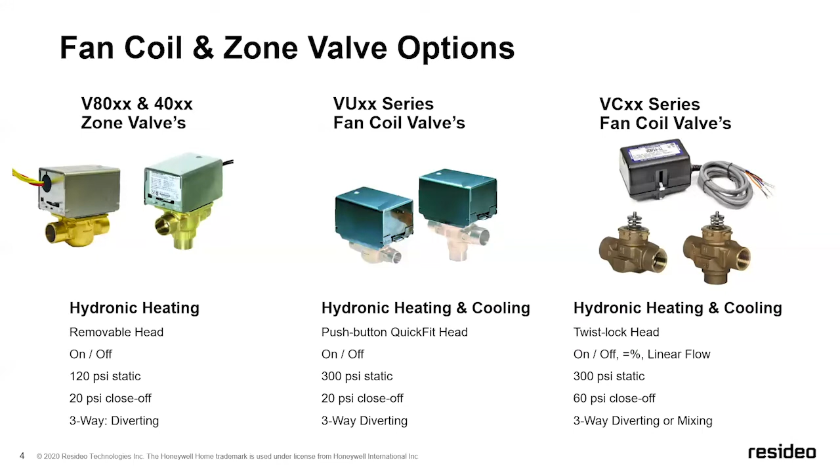Before we jump into any of the technical pieces pertaining to individual valves, I wanted to go over some valve terminology and a basic overview of some things that are consistent across virtually all the configurations that we have. So before we talk about the valves, let's cover the configurations.

In the United States, for radiant heating applications, people typically order a normally closed valve. What that means is that port A is closed, closed via a spring. So when power is not at the valve, a spring holds it in the closed position. It's operated with a standard thermostat that turns it on and off, and really only takes 2 wires to work. I'll go more into the wiring later in this presentation.

In Canada, or at least certain provinces, we see more normally open valves. There's an advantage to that: if the valve fails, the spring forces it open. So in extremely cold climates, if the valve fails, it will go back to the open position, and if you have a pump on, it will still deliver flow through the zone. It gets a little more involved with the thermostat because you have to operate it in reverse, but it's still a simplistic operating valve—2 wires, taking 24 volts or 120 to open or close it.

The other terminology thrown around depends on whether it's residential or commercial. In residential or light commercial, we usually see normally open or normally closed. In the commercial world, you'll see fail open or fail closed—they mean exactly the same thing. I get that question a decent amount.

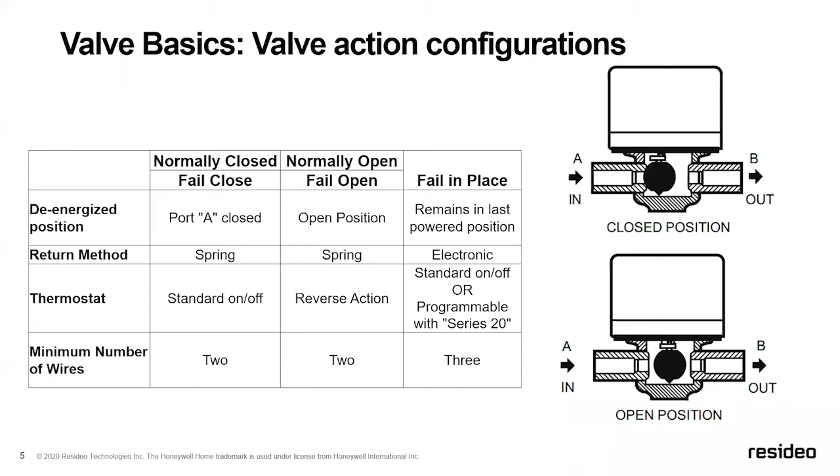The one that's a little unique is the fail-in-place valve. There are no springs in a fail-in-place valve. When you take power away from that valve, it remains in whatever position it was left in, so you essentially have to have voltage to open and close it. We'll talk about these primarily on the VC series valves, but it can be operated either with our Series 20 valve or a standard on-off, depending on the actuator type. The unique piece is that, because there's no spring, it takes 3 wires at a minimum—instead of spring returns like the normally open or normally closed, where you give it 24 volts and the spring takes it back, with this one you have to have electricity to power it open or power it closed.

When we get into positioning and essentially the way valves operate, one thing I want to mention is that when you're looking at a valve and talking about which port is closed, with our product offering we always spec the A port. So if the valve is closed, it's the A port that is closed. All of our valves are stamped with an A and a B, and 3-way valves are stamped with an AB. In a 2-way configuration, that doesn't matter too much, because it doesn't matter if the A port or B port is closed—if either one is closed, you're not going to get flow through.

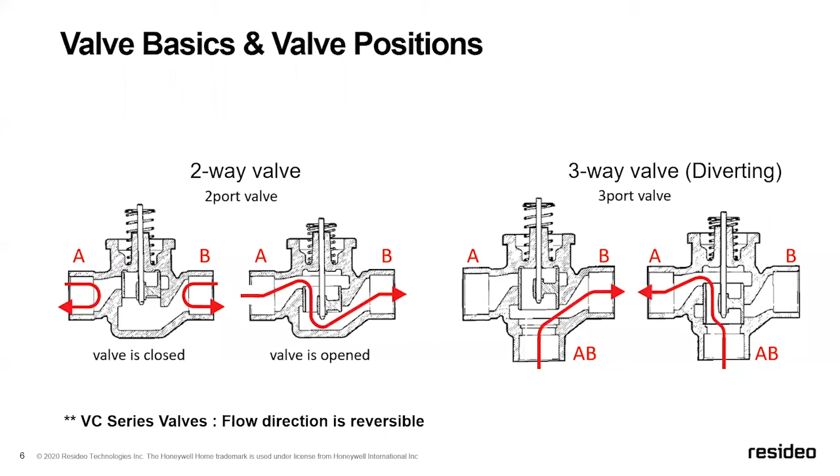Where this does come into play much more is if the A port is closed on a diverting valve. Looking at a 3-way valve in a diverting application—I'll talk about the differences between diverting and mixing later—typically in a diverting application you take water into AB, and it exits either through A or through B, depending on if the valve is open or closed. So in this example, if port A is closed, flow will come in through AB and exit through B. When you give it 24 volts, it flips the positioning of that valve, and now your flow transfers from AB to A. So you're basically diverting the water either through B or A, depending on if you energize the actuator.

Now, when you get into our VC series valve, we do have the ability to do mixing. So what I'm going to do is keep expanding on these 3-way valve configurations and terminologies. If you look at just the basic on-off, meaning the valve is going to open or close and that's it, we call that a changeover valve.

In a mixing operation, you're going to go backwards from the way I just showed it. So you're either going to come in through A and take it to AB, or in through B and take it to AB. In other words, you're having 2 inputs and 1 output. In a diverting operation, it's the previous slide I was showing you, so you're going to divert flow one direction or another.

Now, where our VC series valve becomes unique is you can operate it in a control configuration, meaning you can actually vary the voltage which is going to open that valve proportionally. If you look at it from a mixing standpoint, which is the predominant method I see with these, you can fluctuate that valve to take a mixture of water in from A, which could be hot, and B, which could be cooler, to deliver a consistent temperature coming out of it.

So we usually use an external control to do that. And then same in diverting, but typically in diverting applications, I either see it all the way open or all the way closed.

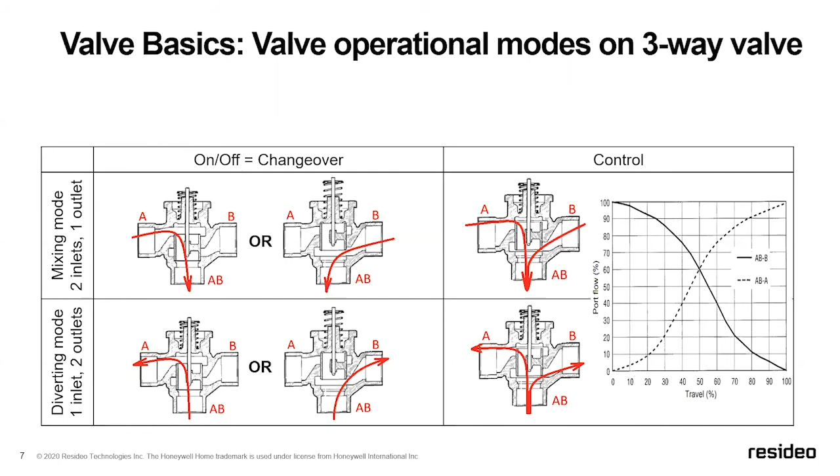The next thing I want to talk about is CV ratings and close-off pressures, because this is something I get asked a lot about. What I've done is I've listed the two zone valves, the V80 series, that are most commonly sold in the Western US. Those two valves are the E1061 and the E1012.

What that means is, if you look at a CV rating, the easiest way I have discovered to explain that is, if a CV rating is set at 3.5 CV - I'm going to use the example of the 1012 zone valve that's up there, the V8043 E1012. It has a CV rating of 3.5. The easiest way to explain what that means from a pressure standpoint is, if you were to take 3.5 gallons a minute through the valve that has a CV of 3.5, that will result in a loss of 1 PSI.

But when we're looking at a radiant world, we typically measure our pressure loss through feet of head instead of PSI. So if you're looking at that 1 PSI of loss, that's going to come out to 2.31 feet of head.

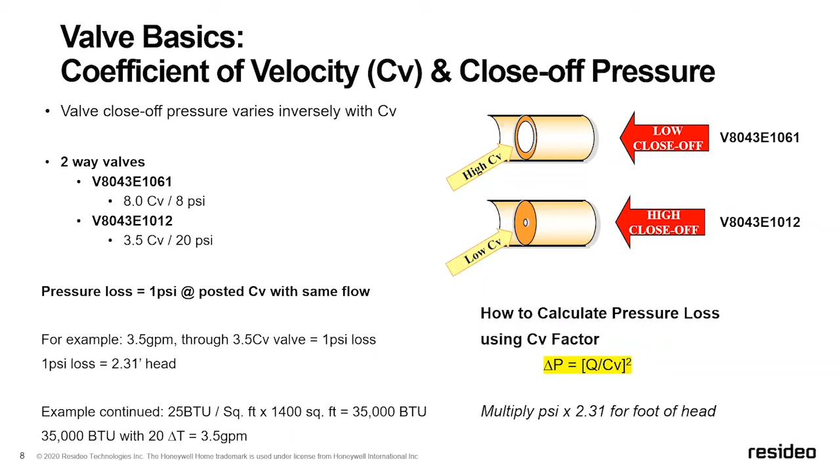That also means the lower resistance you're going to have, but if we look at that 3.5 CV rating again, I don't think I've designed a hydronic system that had the capabilities of needing a larger pump based purely off of 2.3 feet of head added to it. So personally, I'd rather have the higher resistance, the lower CV rating, to give me a valve that has less chance of getting pushed open. I've never really seen that small a pressure loss require a larger pump.

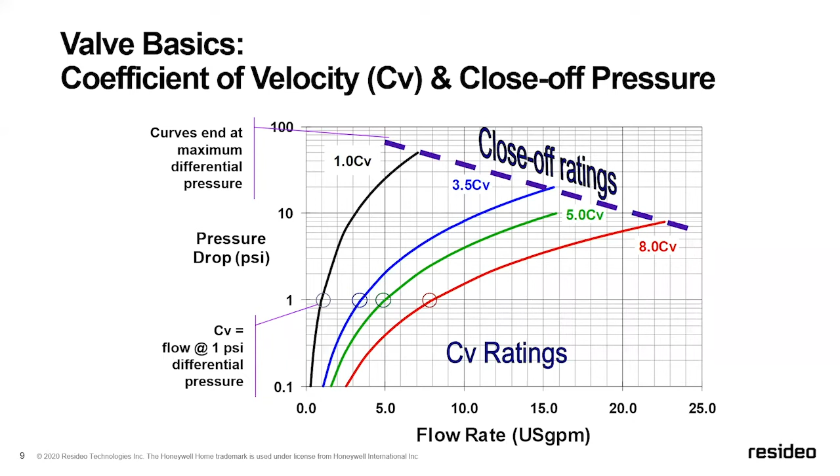With that being said, I think I've covered most of the general terminology that goes into virtually any type of fan coil or zone valve. What I want to do is go through the different series that we have and talk more in detail about the applications, how they work, and what they look like on the inside.

I'm going to start with our V80 and our V40 series. These are the same series valves, but we use a plug style valve with a ball seat. I've got some images I'll show you to talk about what that is. The temperature range on these is 40 to 240. We do offer a steam version of this, and primarily these are utilized for hydronic heating only. We do have some versions that can be used for cooling, but we've got a couple different series of valves that do a little bit better for hydronic cooling.

Traditionally, these series valves for hydronic heating only are on-off control, spring return, and your close-off pressure, like we just talked about, varies depending on the size and the CV rating that you have. The close-off pressure on these ranges between 6.5 and 20 PSI. You've also got a size range on these from 1/2 inch to 1 inch.

We have lots of different connections and styles. For the pipe connection, we've got sweat, press, threaded, flare, as well as inverted flare. On wiring connections, we do 2-wire, which is just the motor, 4-wire, which is the motor and an end switch, and we also offer a terminal strip, which is just the screw terminals. Lots of different configurations. 3/4 inch is by far the most common size, and in the Western US, I see much more with 4 wires, but we've got lots of different options.

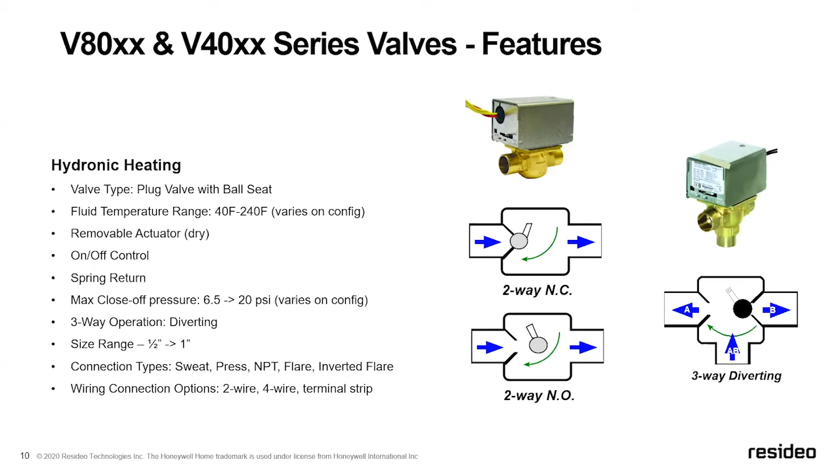Inside of this product family, to continue on with all the different configurations, we have 2 different series of valves. If you look at our 1000 series, that's the one we've had probably the longest. The actuator, which is the silver piece on top, can be removed. That is your most wearable piece, where your motor lies, your end switch lies, everything electronic lies inside of there. We've got the ability to take that off without ever having to service the water.

On the 1000 series, we designed the body to handle 125 PSI static pressure. I haven't seen a residential system get anywhere close to that, and even light commercial systems, that's a pretty hefty pressure on the valve itself. We've got a fairly low current draw. The end switch is rated at 4.4 amps, so you can use light pumps through the end switch. The ball assembly is completely serviceable. The beauty of that is once you sweat that valve in or press it in, once you connect it, there's really no need to ever take that valve back out of the piping.

The reasoning is we've got an adapter plate which can be removed and reinstalled, which is your actual moving parts inside of the valve. We do a 1-year warranty on those.

We've also created another series called Series 5000. It's a little different - same principle, ball style design, but it has a push top on it, so the actuator has a little push button that allows you to remove it instead of screwing it down. The static pressure on this is 300 PSI, much higher pressure rating. It also draws a little less electricity - 7.2 VA instead of 7.7.

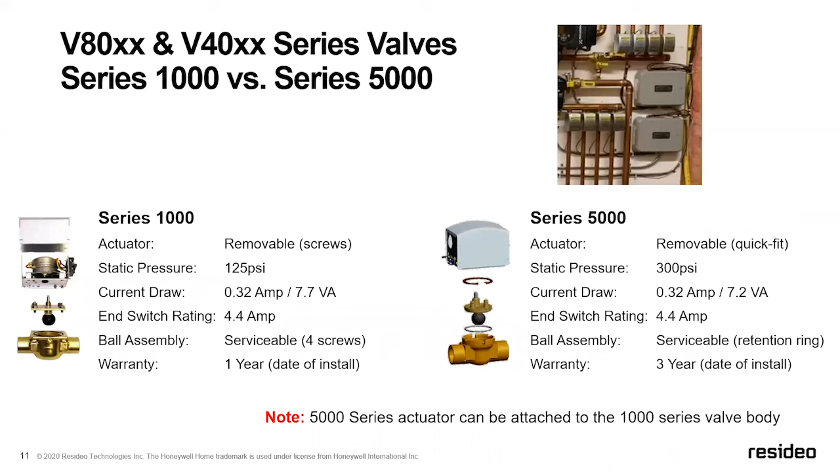Now, the beauty of this valve that we've had for a long time - part of the reason we've been so successful with it - is the actual closing method inside. We use a ball, with a couple different material types, that actually rotates on a spindle. So what makes this unique is as it closes, that ball is going to spin on a spindle, closing on a different spot every single time. So when you look at the wear and life on this, it's significantly better than most of our competition - and by most, it could actually be all.

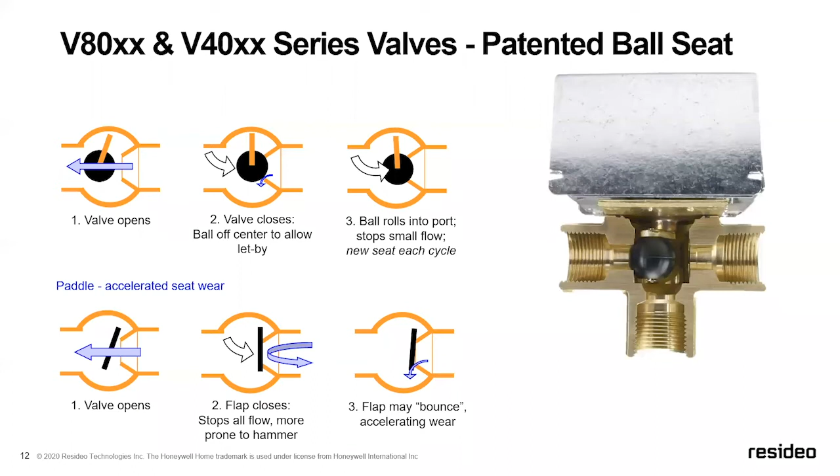I've shown the difference between our plug style valve and a flapper style valve, which exists. When you look at the flapper style, it's going to open or close kind of like a toilet flapper - closing on the exact same spot every single time. Some of the problems with this is it can cause the valve to flap and bounce when it closes, creating water hammer. When you look at the wear characteristics of closing on a single spot every time versus closing on a ball that's spinning around to a different spot every time, you can imagine the longevity of ours compared to our competition.

We've actually gone through and done a test at one of our factories in Mosbach, Germany, where we took a third-party valve and closed it, then looked at the pressure change versus ours. You can see one of our competitors bounces around quite a bit, whereas ours is a very smooth line. I'm showing an image of our 5000 series valve on the right-hand side. The big identifier, jumping back a bit, is the curved top - the 1000 series has a square top. But since we engineered these actuators to go on either the 1000 or the 5000 series valve, this actuator will actually help with water hammer.

So in the rare cases where our 1000 series valve ends up with water hammer, you can take this power head and put it on that body. 9 times out of 10, that will eliminate the issues. If you're having water hammer with any of our valves, more than likely there's something in the system that's causing it.

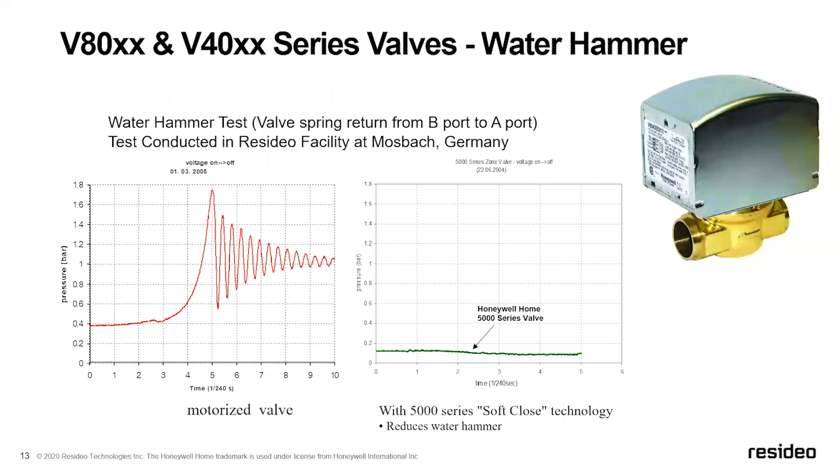But throwing this actuator on that valve body will more than likely solve, well, I should say band-aid the problem. Now I just wanted to touch briefly on our nomenclature. There is a method to our madness on all the different part numbers.

So if you go through this quickly, the first letter designates that it's a valve. The reason I say V80 and V40 series is it's the same valve, but the only difference is the 80 is going to be low voltage, typically 24 volts, whereas the 40 is going to be your high voltage equivalent, so 120 volt, 240 volt, etc.

The next set of numbers designates if it's a two-way or a three-way valve. Then the letter in the middle is actually going to designate what type of configuration it's in. So is it normally open or normally closed? Does it have 2 wires or 4 wires or a terminal strip? It characterizes the configuration of the valve body as well as the electrical connections.

Carrying that through, the next number is going to designate the static pressure rating. So again, if it's a 1000 series, it's going to be a 1. 5000 series is a 5. That's kind of where we came up with that nomenclature. And then the next set of numbers is going to tell us all the extra stuff on it - what the pipe connections are, what the CV rating is, what the size is - those are determined separately.

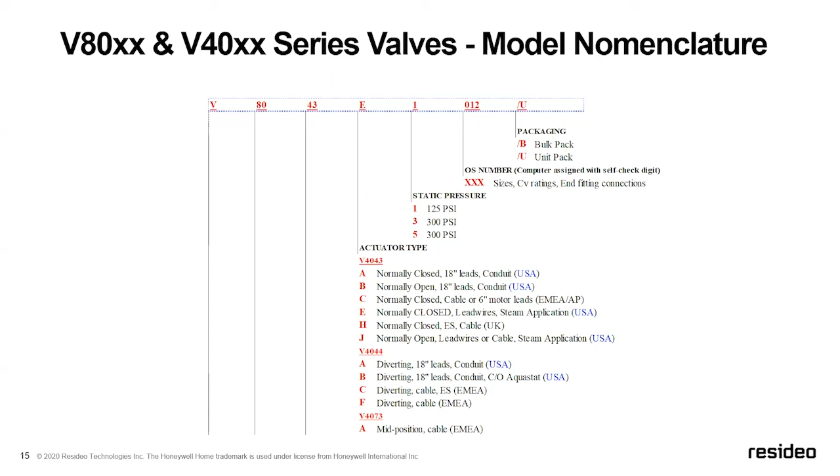Now, we make a lot of different repair parts for these valves. We've had them out in the industry for a long, long time. It's been a very robust valve, and there's a couple different repair parts for them. If you're looking for different repair parts, we have motors that can be replaced by themselves. Each one of these has got a different part number. We make some that are for hot water only, a couple that are for steam, and we do make a couple that are plated so they can handle heating or cooling. But again, most people go to a different series when we look at those.

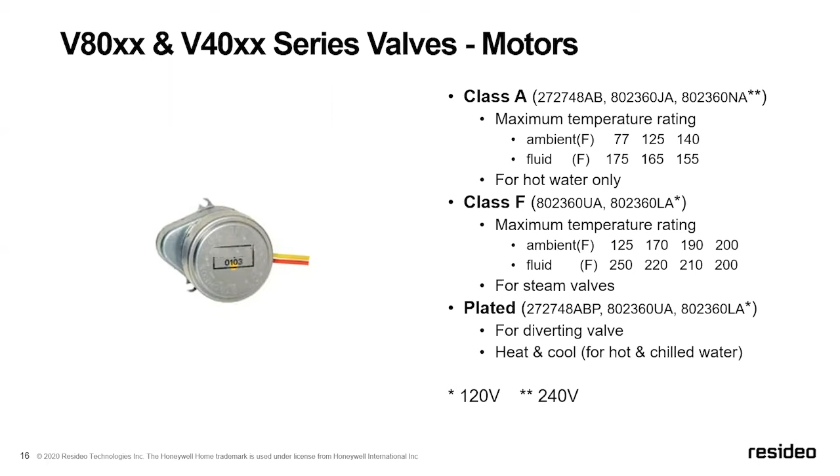And then we also do a couple different adapter plates. What I've seen a lot of people do - you've got two options if you want to replace the guts of the valve. Let's say you've got really bad water quality, it's eating up parts in the valve. You can either buy an adapter plate, which is going to be that piece that sits in between the actual valve body and the actuator that sits on top, and you can get a couple different types of balls in there - we've got some that are Buna rubber and some that are EPDM, I'll show you the difference. But what most people do instead of getting the adapter plates is just buy a new valve and walk it to the job site and replace both the actuator and the motor together.

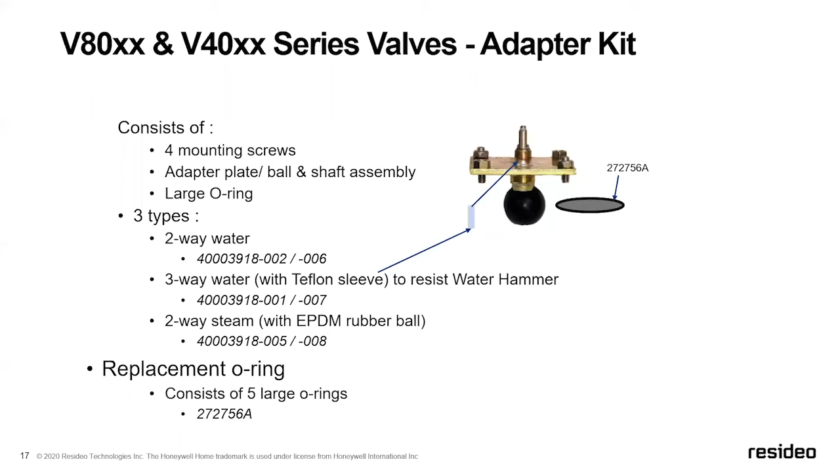When you look at the balls that we use, most commonly we use the Buna rubber. It's used in the majority of our zone valves, our V80 series zone valves. It's resistant to a lot of chemicals that are in the water. But we do offer an EPDM unit, and we identify that style of valve with a white ball. So if you're doing a steam application, you'll want to double check that the ball has got the little white mark on it, so it can handle high temperatures and also oxygenated water. We've got a couple areas of the country where some contractors installed jobs with AquaPEX instead of hePEX - not to pick on Uponor for the branding there - but if you have tubing that does not have an oxygen barrier on it, you may want to look at getting an adapter plate that includes that style of ball because it's going to do a better job of resisting wear.

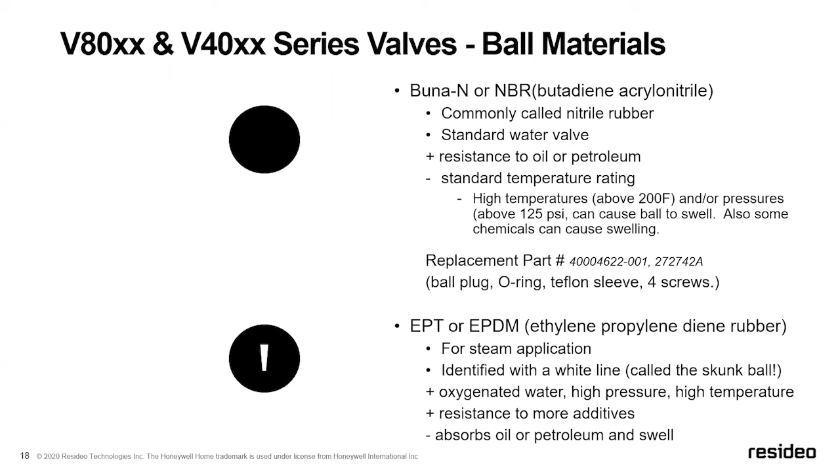When we go to our VU series valve, they are very, very similar to our 5000 series valve we were just going over, so I'm not going to spend as much time on these. The big differentiator on this is the temperature range. These can be used in both heating and cooling applications, with a temperature range from 34 to 200 degrees.

These are also going to be on-off, spring return. We do have some higher close-off pressure ratings on these, but we also don't offer as many connection types. So your options are either sweat or threaded, and your wiring is either 2-wire or 4-wire. Very similar to the series we showed before.

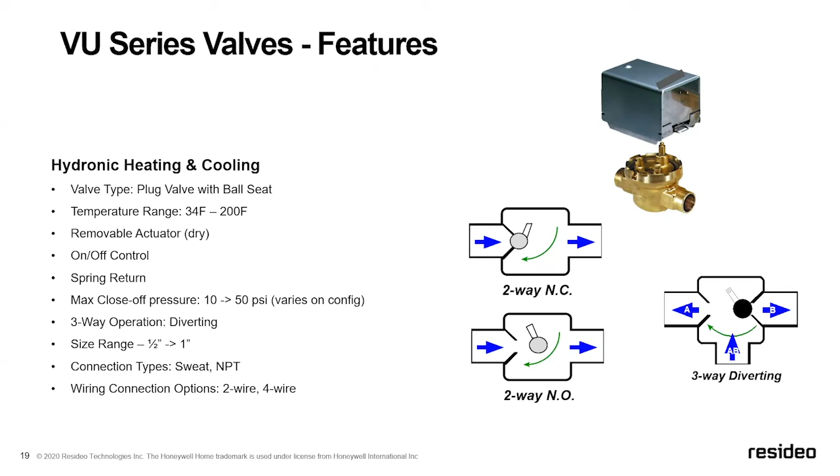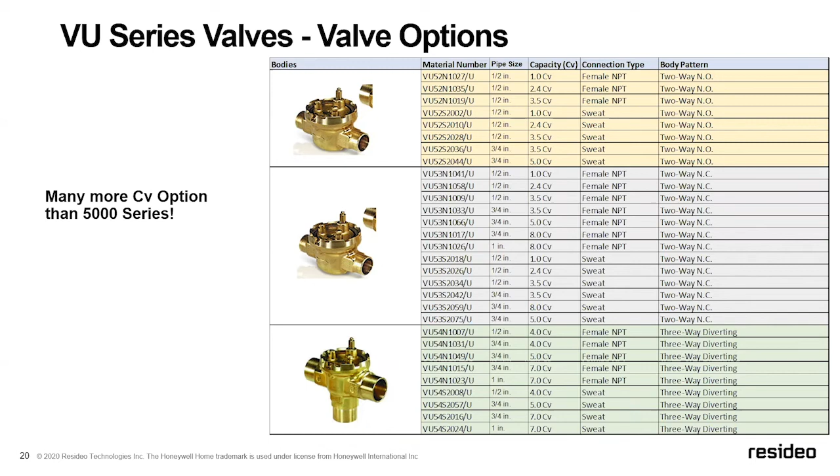The big difference is you buy these units separately. Whereas the V80 and the 40 series you buy as a pair, with this series you're going to buy the valve body and the actuator separately. The big thing I want to highlight is if you're looking at your different CV ratings, if you really want to dial the flow rate into, say, a fan coil, this is probably going to be a slightly better application because you can dial those CV ratings in much more exactly than you can on our 5000 series.

The other thing we do is these are in a slightly lower profile, so they're great for tight spots. If you have baseboard enclosures or other areas where there's not much room, these fit in a very low profile. We also offer corrosion resistant actuators, so if you're in an area with high humidity or other chemicals in the air, we have corrosion resistant actuators which make it a little more resilient out on those applications. But other than that, it's very similar to what I was just showing in the previous series, as far as the way the valve operates and the ball inside of it works. It's basically the same style of valve, just separated, and you've got more options there.

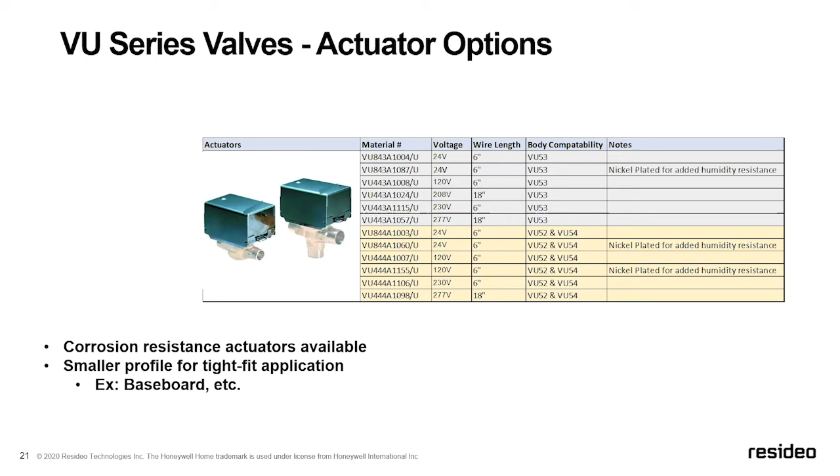Now, where things change dramatically when you're looking at our valve offering is our VC series valve. Instead of using a plug style like in the previous two series I showed, we use a gate valve here. The temperature range on these is great for heating and cooling, from 34 to 203 degrees. Not only do these do on-off, but we also offer these in floating and modulating.

Now, the big difference when it comes to wiring, these are not spring return. I've got some wiring examples I'll be showing in just a few minutes that will walk through how you wire up all the different series of valves I'm showing you. But these are a little different than what a lot of people are used to on residential and light commercial valves. We make these in a bigger size range, 1/2 inch through 1.25 inch on the valve bodies. And on the wiring options, we have a 3-wire or a 6-wire, so essentially it's on-off with no end switch, or on-off floating with end switches.

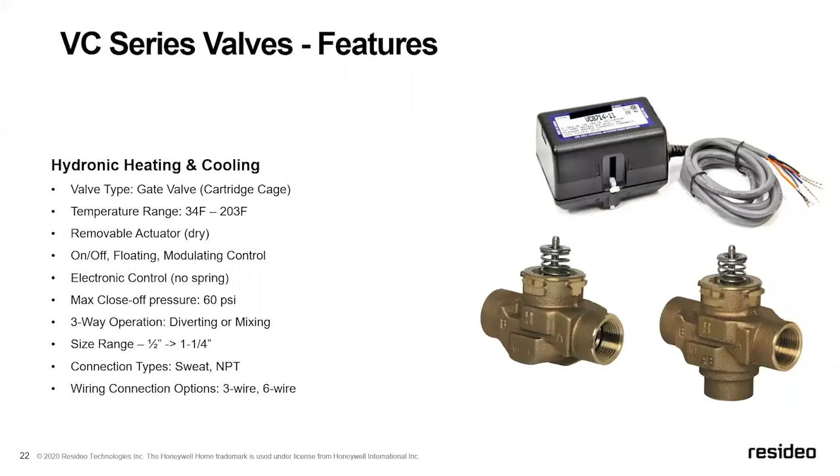Going through the nomenclature, I'm not going to read through everything here, but I do want to highlight again the size range. I get asked a lot of times for 1.25 inch zone valves. My response is typically, well, what do you need for your flow rate? Because a lot of times you don't really need a 1.25 inch valve. You can size down to a 1 inch because, again, talking about the CV ratings, it's not necessarily about pipe size, it's more about the flow rate going through there and the resistance you're going to have. But with this series of valves, we can get up to a 1.25 inch body, and again, 1/2 inch through 1.25 inch in sweat and threaded.

Now, when you're pairing these up, because this is similar to our VU, you have to buy the bodies and the actuators separately. The actuators have 2 different series, so depending on the series of actuator you want to use, you're going to have to match that up to the valve body correctly. And then we make linear flow, we make on-off, and we make equal percentage as well.

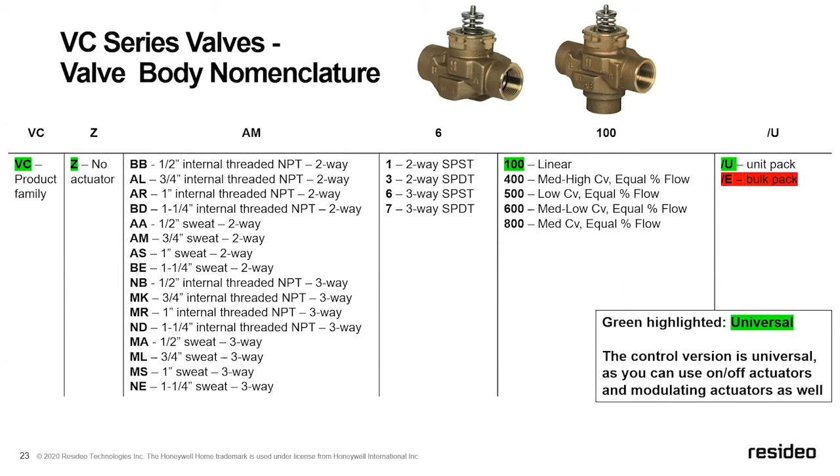The big difference is the way the valves actually operate. Our previous two valves were ball style plug valves. This one is a cartridge cage design, so every single one of these has a little cartridge that threads in. Instead of having that adapter plate, this takes the place of that.

We've got a couple different configurations. We make it in 2-port or 3-port, meaning is it for a 2-way valve or a 3-way valve. Then we have on-off, so if you're just going to be giving it 24 volts to open or close it - or could be 120 volts. Or if you need a control valve, one that's actually going to modulate, if you're going to have it sitting in between those extreme on and off areas.

Then we've got, again helping out with the part numbers because there's a lot of different pieces in these, this helps you identify what type of actuator it is. We have cheat sheets - if you ever get stuck on what you need, reach out to your local rep. We have cheat sheets that allow us to go in and identify what's what on these. But you do need a specific tool - I got a part number up there on the screen.

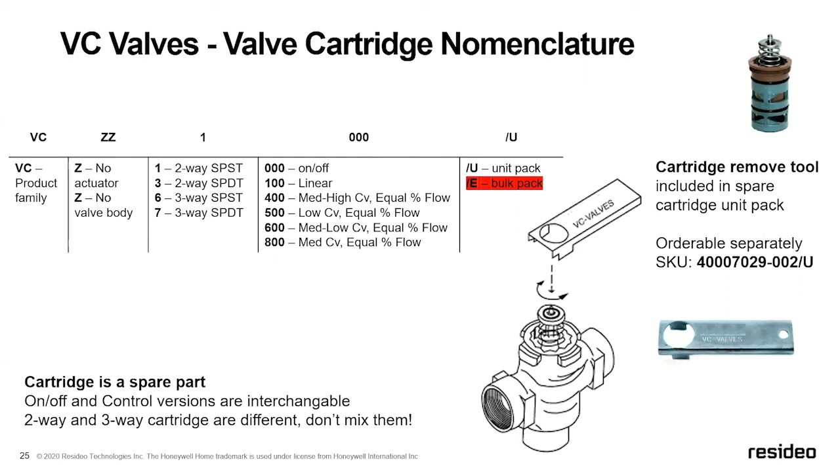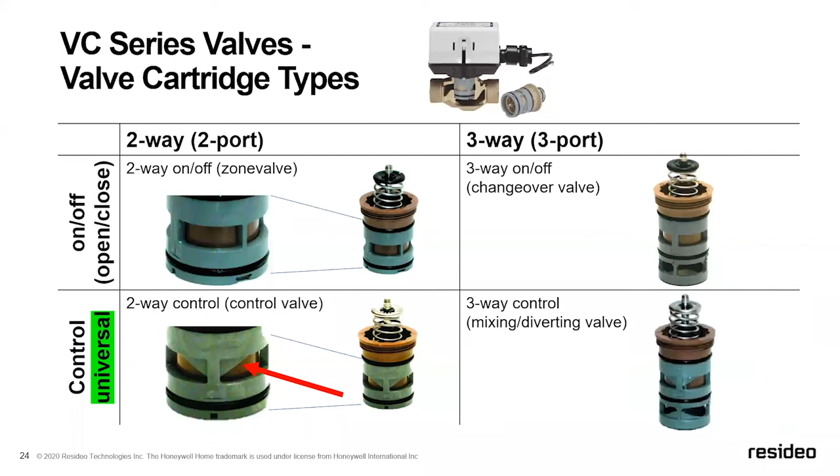Then when you get to the actuator, this is what makes this valve series unique. We have lots and lots of different options for the way that you want to actuate these valves. If you're looking at the VC series actuators, we make it in 3 different voltages for on-off: 24 volts, 120 volt, 240 volt. But then we also have 24 volt floating.

We have 0 to 10 volt or 4 to 20 milliamp, which is an external signal that you give to basically tell it where you want it to open and close to. We can also do pulse width modulation. So those bottom three - the floating, the 0 to 10, the 4 to 20 milliamp, and the pulse width - those are all going to be controlled through some kind of an external control.

We offer our T775s, which is a modulating control that you can do a lot of different things with. But where I see these most commonly linked together is we have an outdoor reset modulating control. So what you'll do is put in your 3-way valve, use our T775 with an outdoor reset, and what will happen is you'll use a system sensor on the outlet that will fluctuate that valve to make sure it's taking a blend to deliver the correct temperature through the outlet.

But with any control, if you're working with an existing control system, these valves can be retrofitted in as well.

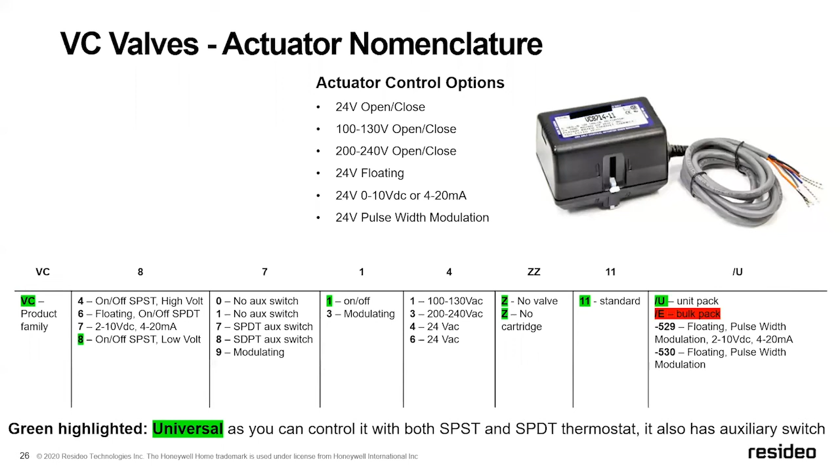Now when you're looking at these different types of actuators within the VC series, this is where the wiring is a little different from what most people are used to. We have two different series: a single pole, single throw, and a single pole, double throw. Pay attention when you're ordering the actuator to get the one that you're looking for, because they are going to wire up completely different.

And I've got some better diagrams that I'll show you here in just a minute.

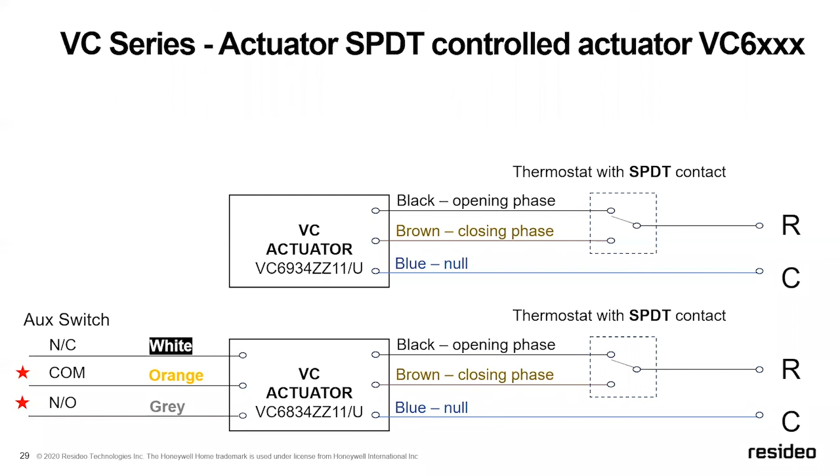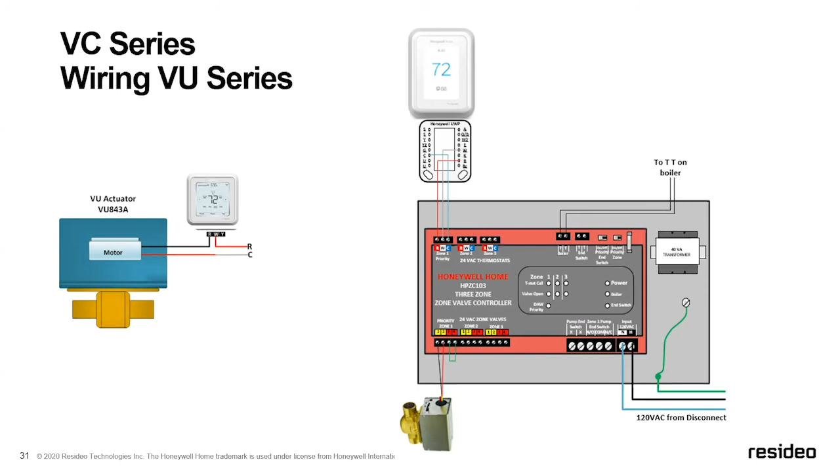Looking at it from our hydronic panel, we take the same wiring to the thermostat. In this example, we're using a Wi-Fi thermostat, so we're using 3 wires. The zone valve down at the bottom, that VC series, wires up pretty straightforward—it's just about making sure you connect the right colored wires to the right terminals. So the motor is going to be black and brown, and black and blue connects at the bottom, but then I show how you bring the R across there on the outside.

Now, what I've had a lot of contractors do as well is, if you look, I'm showing this off to the side—this is the one that doesn't technically connect through the board. You can still bring that thermostat wire through the cover on the board so it kind of hides it. I wanted to point that out because that's the one extra wire that has to connect to the valve, and it's a bit different.